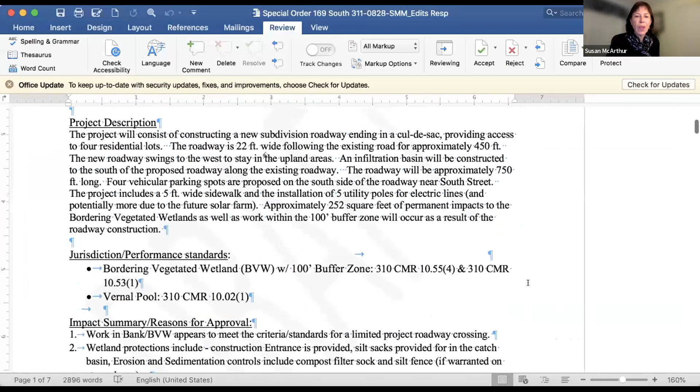Mary drafted the special conditions and we went over it and made a few edits, and Mary rebutted some of those or added to them. I don't think these ones are any issue. Well, let's see, hold on.

The easement for construction of the trail down by the town will be provided subject to the development of the solar farm. And she questioned that. Is that correct, Mary, you're asking about it? I think my thought is, for example, if the solar farm does not ever get developed, the commission might still want the possibility of developing a trail. That was my only thought.

Rick, you want to address that? When this originally came up, Mike had stated that would be his preference, that they had access if the solar farm was developed, and that's what I was going on. If we feel differently now, we're moving forward with the solar farm. We have a 160-day clock that just started on the 9th of this month, 160 business days that National Grid has set. So after that we are moving forward with development. I hear your point that it's possible it doesn't get developed, but it's very likely it is. So I hope that answers your question.

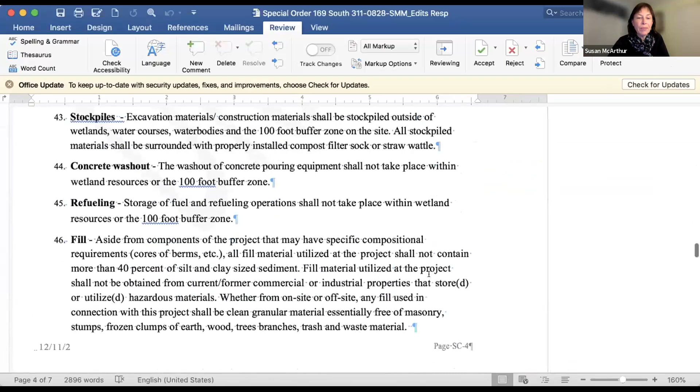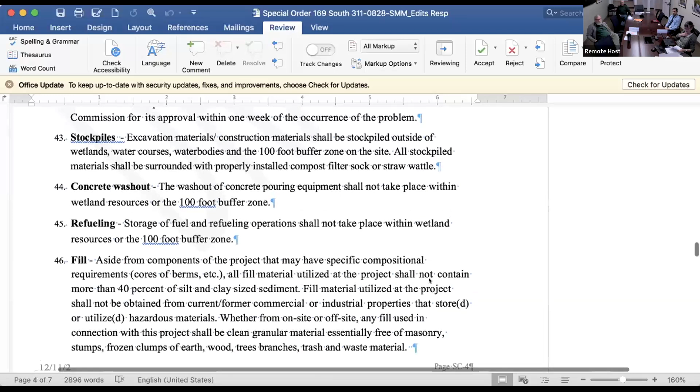Just scroll to where the next comments are. Unless the commission wants to go through each individual one, but Mary, tell me, do you want me to slow down? I think you can go ahead to condition 47 or 48. Yeah, okay.

I guess 48 is basically the same as that first one we were talking about, about the trails - four parking spots at the entrance for the future trail access. Just once the solar is developed, yeah, we'll add that if the board's okay with that. Yep, okay.

For 47, we are okay with shifting the replication area if need be, just to avoid taking some large trees down. I don't know how much we'll be able to shift it because it's near the roadway, and there are roots to the trees and whatnot. So, but I think we'll be okay where it is. But yes, we're amenable to that.

So the bounds - we had asked about what was the intent of this, because with the subdivision approval we are going to mark the corners of where the lots are going to be, but you meant the bounds of the 25-foot, the locally regulated buffer, is that what you meant? Yes, I guess it would be the notice or the no-disturb, the limited notice, like for the vernal pool lots.

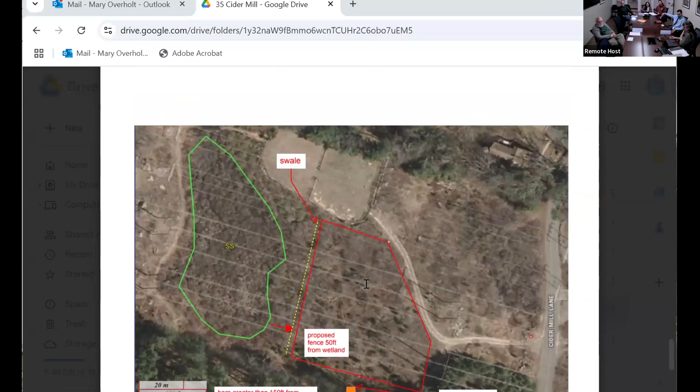All right, so I think after the last meeting, the thing that was missing, the commission had asked for a management plan for the manure and animals. And so he came up with this, showing a compost area here, near the barn and far away from this wetland, and there's another wetland over here on this side as well.

So it's far away from both wetlands. And then we talked about the swale in back. He describes the swale as about 3 feet wide, 1 foot deep, going all along the rear. And the fence posts were to be put in concrete, not that we have to, but...

You can do whatever you want, but I got you. Maybe the sleeves, I don't know about the sleeves, but I think a lot of recommendations obviously say don't use concrete, because it's rock, but basically the water pools around the top of the concrete, and that will accelerate the decomposition. Sure, also it's a lot more work. Yeah, do you want to just make it sturdier to make sure the animals don't get through.

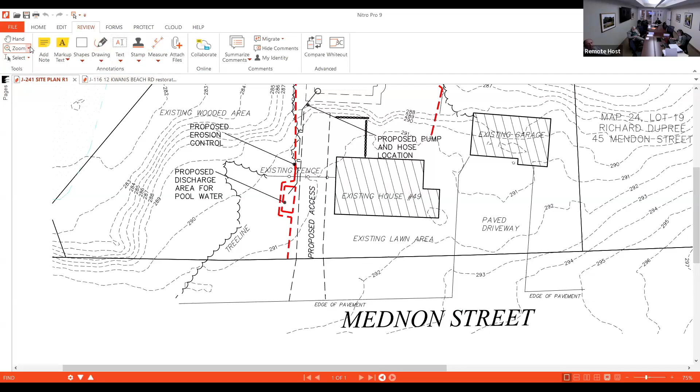Yes, I am. Good evening. Thank you, Mary. So Peter, can you explain? Can I share the screen? I think you should be able to, yeah. Okay. One second. Oh, wrong way. Okay, so...

For the record, my name's Peter Lavoie. I work with D&L Design Group. I'm here tonight representing the homeowner at 49 Mendon Street. Mendon Street runs along the bottom of the screen. So we filed an RDA to remove the concrete apron and the in-ground swimming pool in the backyard.

So what we're proposing is wattles. There is an existing chain link fence that runs along the back and then stops right at the house up here. We want to put wattles in red along the chain link fence, and then up towards Mendon Street. You can see the proposed access for the equipment so they can remove the concrete apron. All access will be in this location here on the left of the house.

Mary had a concern about pumping the water out of the pool, so I show a little circle where the deep end is, where the pump would be. And then I show where the hose would come up along the access and pump into this little discharge area up along the side in the front yard. No vegetation will have to be cut.

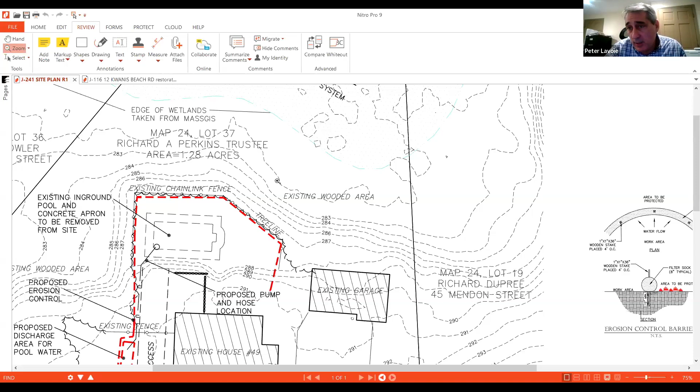Thank you. Do you have any questions from the commission, or from Mary? Do you need erosion control? I have a garage full of it. How many feet? I don't know, probably 100, maybe 150 feet. Bill, we have that much, right? We sure do. I'll let Glenn know.

Glenn has seen some of that erosion control before. Actually, Marcella, I think the guy at 10 Old Grafton Road is very interested in it too, but he hasn't called you. I think we have enough for both projects. Hey Peter, just so you know, the commission bought this erosion control for a project we constructed, and now it's not needed anymore.

But the thing you should know is it's straw wattles without poly netting. So in this case, they're probably going to want to remove it anyway. But if this was an area where you didn't necessarily have to remove the wattles, they could just decompose in place because there's no poly netting. I'll tell Glenn Barrows to call Mary and get the information. Maybe that'll help him out.

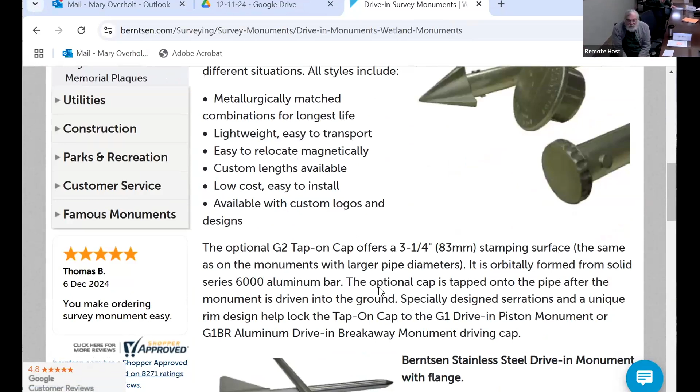So with the Berntsen things, there'll be a cap with the W on top, is that what we're asking for? Build custom, I think, there you go. Wetland monuments. Says Forest Service, but you can probably get it. Yeah, I think you can get them with different options. Interesting, learn something.

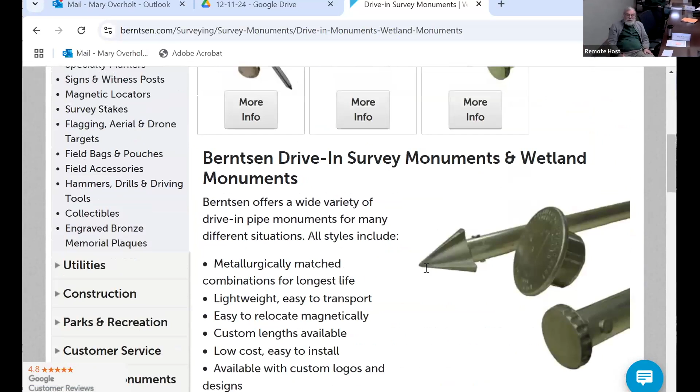You have to have something priced. Okay, yeah, I'm not against something put in. The concrete posts really were very excessive, especially when I looked up and they're $100 a piece. And then I gotta lug the thing all the way down the hill.

These will be about the same cost, but they won't be the same to deal with. It would be a lot easier. Can Mary send you the link to this webpage?

She can, she has my email. Okay, yeah. Perfect. Now, what are the two posts, this is what you're looking for, the wetland monument?

Well, it certainly looks like you can just pound it in. You make your decision, but it looks interesting to me. You can dig a hole. No, it seems like it.

And then Mary, would you like to come out and show me exactly where you want the two bounds to go? Sure. Okay, and we can even, I wonder if you could even paste our little square thing on top of that, glue maybe, possibly.

Or screw, screw it on. Yeah, because we have markers that go on the post, they're 4 by 4 inches, so it might stick out a little bit. But I wonder if they have the option of getting like a W or something on the cap. Yeah, it seemed there were options when you were looking at the cap.

Yeah, anyway, look for one with a W. Or you could probably just go into search or something. Cool, that one.

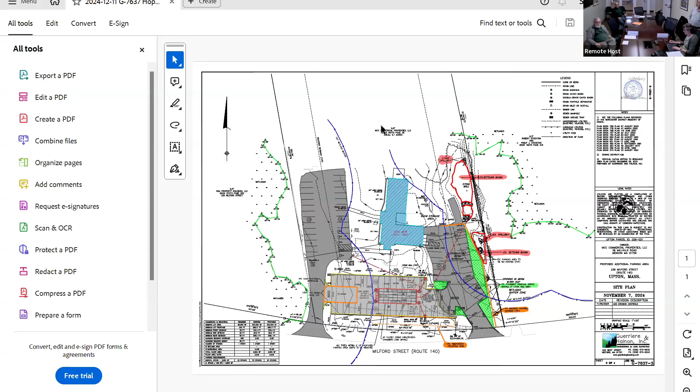I can explain what we're looking at. The blue is the building for Hopedale Cardiology, and the darker gray are two existing parking lots. Basically the clients all come in on the left side and the employees stay on the right. Apparently they don't have enough parking for the facility, so the light gray is a new parking lot added.

What we've got is a construction entrance that would be built before they start, and erosion control on the right side of the site. I don't know if any of you are here from 2015, but back then there used to be a pipe that went out to the wetlands that had to be removed, and these two sediment basins were constructed back then.

What we're going to do is take advantage of this existing 8-inch pipe that's here, taking the water in 2 catch basins off of this proposed parking lot, putting it into an underground detention basin, and allowing that 8-inch pipe to carry the water over there. There's also an existing 4-inch pipe that crosses — we're going to intercept that and bring it into that detention basin.

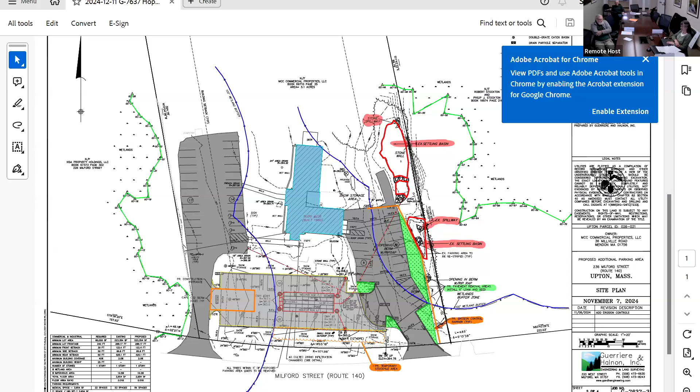So can we have a motion from the commission to continue this hearing? I won't be on the first. Won't deliver it on the first of January. Okay, yeah, you can do the second if you want. Thank you, that's fine. Second. Okay, let's do a voice vote. First, aye. Alan, aye. Marcella, aye. So a unanimous vote of the commission to continue this hearing until January 8th at 7:30. Thank you, everybody.

Okay, so Mary, how about your administrative report? We need to move on to Kiwanis Beach because they're waiting to talk. Oh okay, I guess I should have given them a name time, but we didn't. For Kiwanis, we have...

So Peter, are you here for 18 Kiwanis? Yes, I am. So what's the update? So the update is Mary Ann DePinto had gone out to the site. She did an inventory of the trees, and I think she also came up with an estimate on the restoration that I emailed Mary. I know Mary had talked to Marcella, I think Marcella is on also.

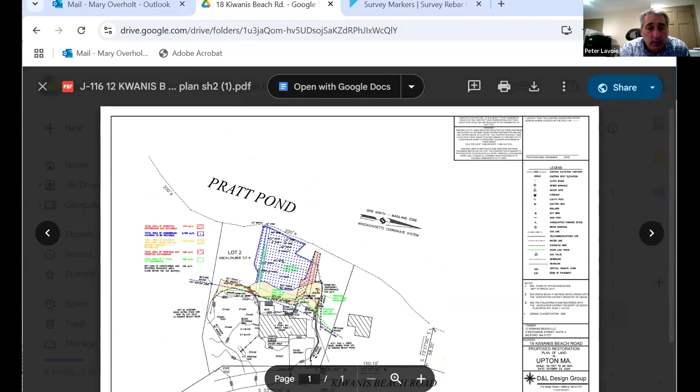Peter, is that on your current plan? Maybe we should bring that up. I think it is, it's the limit of that new line, but I can submit a plan that shows specifically the boulder wall and the additional bounds, and I can explain it in the letter. So it's the green line, basically.

That green line is the new limit of disturbance, which is the boulder wall. So they're going to construct the boulder wall along that green line and put the additional bounds along that line.

I think it comes out to like 8 bounds total. Yeah, I think we discussed bounds kind of in between the boulders. Correct, yep. And there'll be just a small opening where we have that path to the dock.

Yeah, and I think that the amended plan won't have the color, it'll just show the proposed wall and then the new path and the bounds. And I'll just explain that in a letter to the commission.

Kind of like an as-built. I mean that's when we come to getting a certificate of compliance, we're looking for an as-built showing the bounds and the boulder wall, et cetera.

Correct, yep. And then we'll do an as-built once everything's done, and then we'll submit that to the commission. Once he finishes all that work, we'll submit that as-built with the new boulder wall and the bounds. And I think for the bounds, there will be 8 medallions that would need to be purchased and put on the bounds.

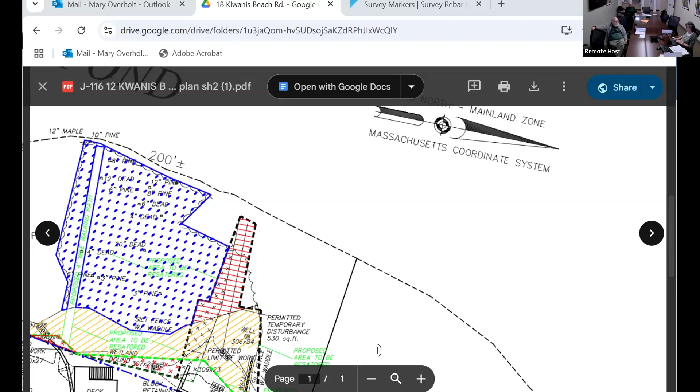Pay to conservation, paid to the town. I don't know, I honestly don't know what fund would put that in, we'll figure that out later. It would probably go into one of the wetlands funds, either by law.

And then, so I think in terms of lifting the enforcement order, it will probably stay in place until the restoration area is planted. I think that would make sense, and then we could release that, but the certificate of compliance won't be given until 2 years later.

And do we need Russell to do an amended notice of intent? Yes, he needs an amended order of conditions. So do you think the 8th of January would be enough time to do that? Yes, that's fine, it's just writing a letter and cleaning up the plan.

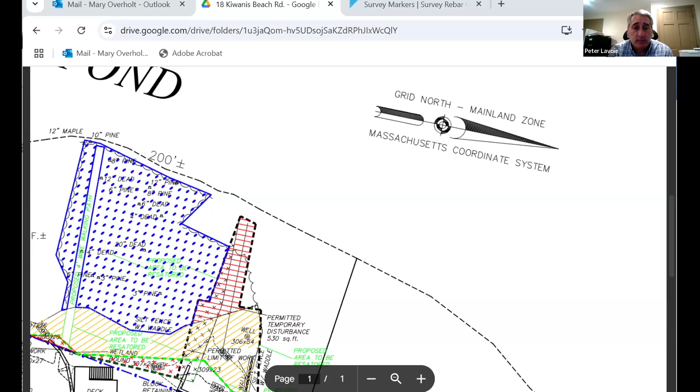All right, so we have that motion kind of stated, you guys want to vote on it? Okay, let's have a second for that motion. Second. Okay, let's do a voice vote. Aye. Aye. Micah, Marcella, aye. That's a majority of the commission.

Okay, so one question here, once I posted that bond, to which department do I bring the checks? And two, when will the conservation allow the building department to issue the CO for the house? I guess I'd like to see the boulders in place.

Yeah, we have to wait, we have to see that it's done, before they release the occupancy. That's what I would like to see. But I'd like to see the work get done. And where do I bring the check? Conservation office, yep. You can leave it with the building department, they'll get it to me if I'm not there. Sounds good. And then just call me when you've got the boulders in, I'll come out and take a look at it.

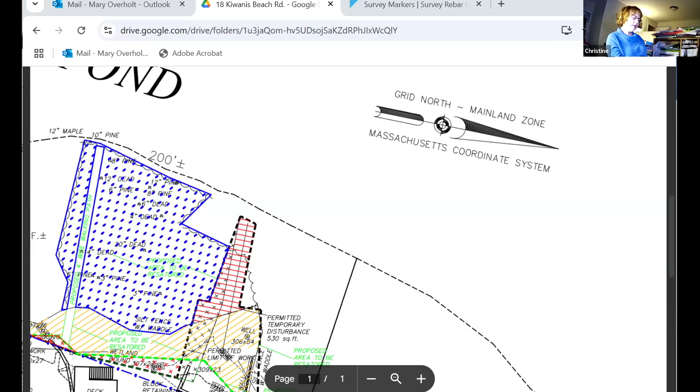Okay, now I think we have the administrative report. I noticed we have a few people online. I don't know if they're here for a reason. We have Scott Goddard and... yes, allowed to talk. Oh, okay. So, Scott, welcome. What would you like to say? I see you have your hand up.

Good evening, can you hear me all? Yes, perfect. So, Scott Goddard, Goddard Consulting. How's everybody doing this evening? I'm here with Mark Wombolt, and he was asked to attend the meeting this evening by Mary to discuss his property on Route 140. There were some questions about clearing of trees and such. I don't believe there's been any administrative action taken, but there was a request to come in for a discussion. Mark is on the call as well, and I'm here to engage in a brief discussion of this property with the commission.

Great, yeah, so last week I put a stop work on 41 Milford, across from the gas station, because of extensive grading work and fill in the area. I do have a few pictures in my agent report. Scott, did you have any pictures or anything you wanted to present on this?

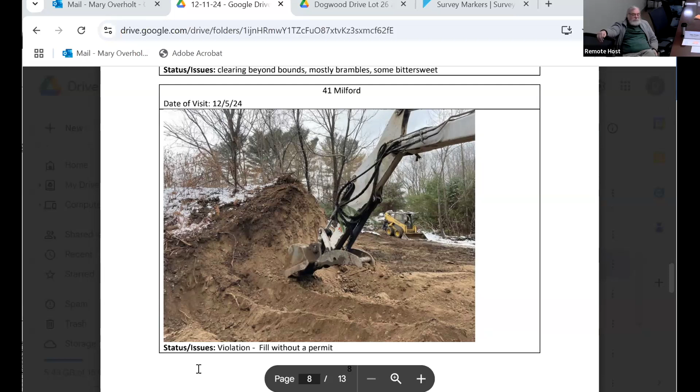Can I ask Mary, what color flags did they have? Blue flags, remember? And are there any flags still out there? It sounds like some have been removed. I'm just curious if any flags are still out there. There had been a few, there were still a few flags out there. I don't remember what color, I think they might have been pink actually.

But anyway, the 2007 information is interesting, but not relevant, I think, to our current decisions. That's my opinion. Okay, Mark, you've been trying to talk, you're allowed to talk.

Yes, can you hear me? Yes, hello? Yeah, we can hear you. Yeah, okay, I don't know why, but it wasn't working.

Basically, I'm going to have Scott come out, but we had an order of conditions 2008 through 2013 that showed no wetlands on that property except in the far right corner. There was nothing out towards the street. And as I told you, we were harvesting a bunch of trees and transplanting them onto another job site, and that's primarily what we've been doing out there.

But after you stopped by and we had our phone conversation, I called Mr. Goddard, and he's going to go in and we'll meet out there and do what we need to do. But you do have an order of conditions. I had a foundation permit for 8 condo units on that property, back in 2008, from the building department. So that entire property was stripped and cleared in preparation for that job, which when the 2008 crash occurred, we did not go forward with. And now we're just harvesting trees, nothing's been done since that time on that property until just now.

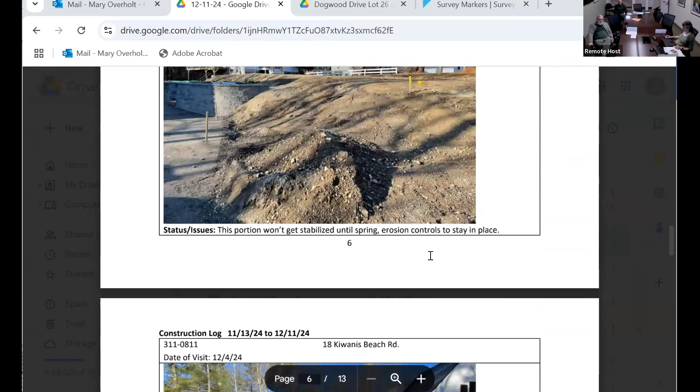Just reports on things under construction. Here's the kind of the bound line for Kiwanis Beach. We talked about this, so that's everything.

Everything from my administrator's report. Excellent, thank you, Mary. And how about the administrative report?

I do have documents for Tom and Mike to sign. Probably I'll need people to come in, or we can drive stuff to Chris. We'll need a few more signatures, at least 4. And there's one expense voucher, which is just my mileage.

Do we have a motion to pay Mary's mileage? So moved. Second. Sue Boyce, Chris, aye. Micah, aye. Alan, aye. Marcella, aye. Excellent, that's a yes for the commission.

That's those things we need to do. And Mary, do you have a financial update? Yeah, I did do an updated thing if you guys want to look at it. So it's 4 documents. The only change would have been the $25, but I'll pull it up to the screen.

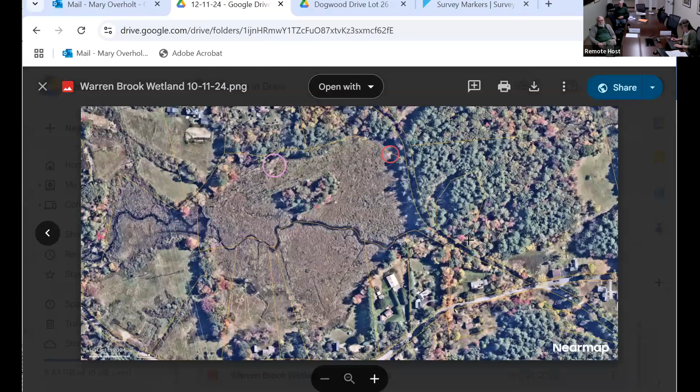Maybe blow it up just a bit, especially show the top. So where is this one? Okay, is that good? Okay, I guess this is okay.

Warren Brook kind of flows through the center of this. Mechanic Street is to the bottom. Fowler Street, that's the island in the middle there. Fowler Street, Sandy's house. That's Mechanic. Fowler goes right by the red circle. You kind of follow it. So is this Sandy's house here?

Yeah, okay. So most of this is the Robertson Conservation Restriction, not all of it, but at least the land east of Warren Brook is part of the CR, the Robertson CR. Some of this area is actually town land, and some of it is owned by the people.

And what I noticed when I drove by Fowler Street, the red circle, that's a patch of phragmites. Not very big, but it's there. And then I took a look at the imagery, and it's possible that the pink circle is also phragmites. But I'm really not sure, you'd have to field verify that.

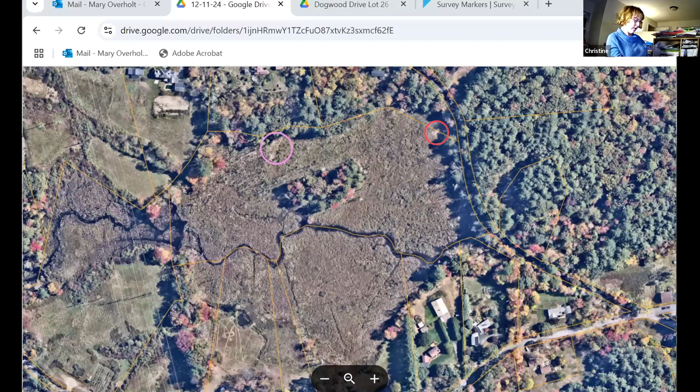And we don't have to do this tonight. We have the annual report due by the end of January, and the budget for 2026. Yeah, that's high on my list of things to do. I pulled out the annual report and looked at it today, but I need to go through all the numbers.

That'll be, unfortunately, it would have been nice to have it done so you guys could read it, but I don't think it's due till after our next meeting. Fine, it's just on the radar. Yes, and thank you. Mike, do you have anything else?

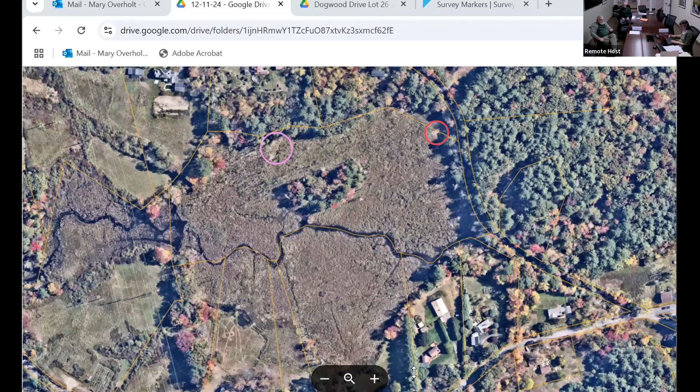There is another thing, and I know it's getting kind of late, but Mary, could you call up Dogwood Drive, the other end of Dogwood Drive? Yeah, so this is the other end of Dogwood Drive from like two Dogwood.

Let's see, Mary, could you flip up through the plan? I think the plan is attached to, or are they two different? No, it should be. Did you even see them? Okay, this one. Well, maybe blow it up just a bit.

So we've talked about this point before. See, that is what Mary's kind of delineating is that's town land that is part of the conservation area. And then the point is right on Dogwood Drive, and we've talked about this before. Can you jump across that point? Or what is the status of that?

And we now have the developer who is willing to modify an easement on the other end. And to me, I think maybe this is our opportunity to try to fix this end as well.

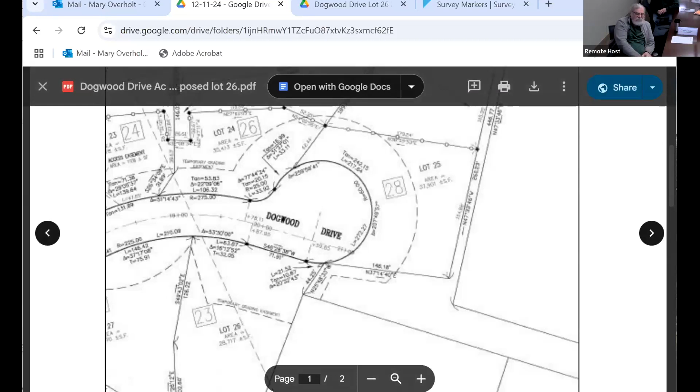Wait a second, motion. I second the motion. Let's do a voice vote. Press the aye. Micah, Marcella, aye. We need to cap the cost.

Maybe, well, can we see what the cost is? Okay, so maybe a friendly amendment that the motion is to obtain cost estimate to install 3 bounds or to locate, the mark, locate and mark 3 corners. Whatever, let's do it.

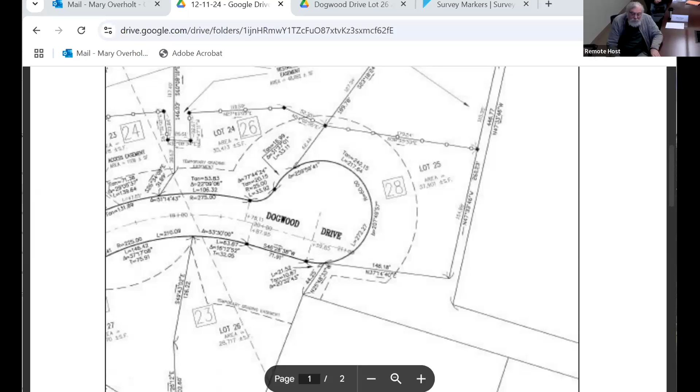Could you reread them? Let's see. Motion to hire a surveyor to obtain cost estimates to locate and mark 3 corners, which I still have in my head. No, I mean, I have that written down, but which corners it was, I'll say corners adjacent to the point. Okay, do we have a second?

Second. Okay, let's do a voice vote. Press the aye. Micah, Marcella, aye. Is Ellen still here? So we have a majority of the Conservation Commission voting.

Okay, now Mike, you're in Santa Claus, right? Pardon? You're in Santa Claus, right? Yes, I am, yeah. You got the white beard.